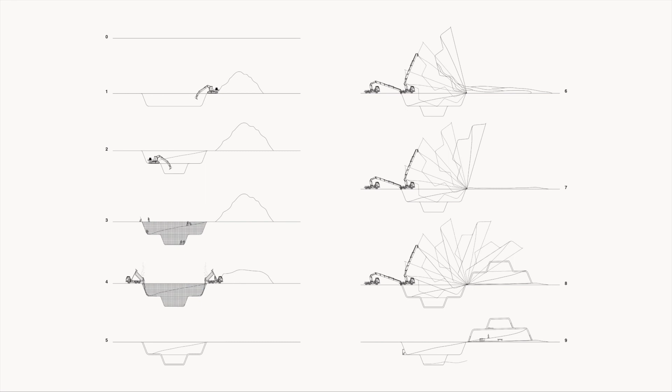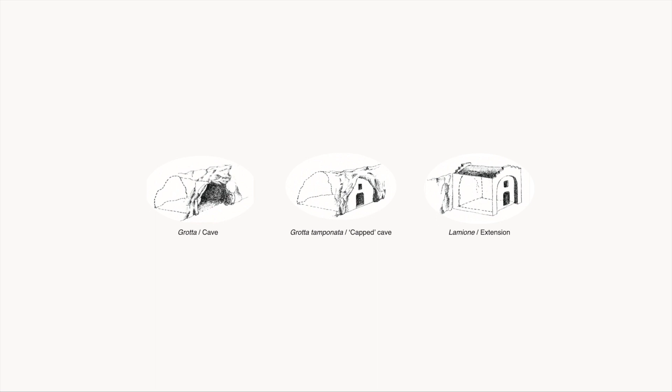Also, the process of construction is itself a lived architecture, and the domestic space is a direct result of that process. Material displacement is explained by the example of Matera, a city in Italy, where the material carved out from the cave is used both for capping the cave and for building extension to the rock.

This different materiality brings about another kind of domesticity, seen in examples of Chinese Yaodong sunken houses, of Matmata in Tunisia, and of a Buddhist monastery in India.

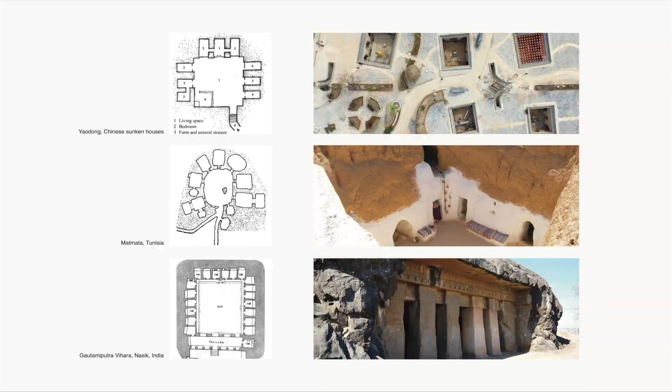Today, a similar level of intimacy and materiality can be made possible with a technique called cast earth. In the mix is soil, water, calcined gypsum, and a set retarder. This opens up possibilities of building at a fast rate.

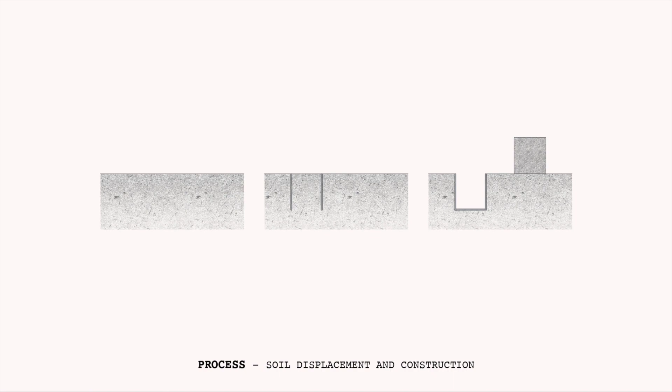The process itself is the first instance in the project where two elements, apparently unrelated and in contrast to each other, the man-made and the more natural, are no longer opposed, but part of one same process. After driving sheet piles in the ground, the soil is excavated and used for the building above ground. The hole, resulting from soil extraction, is inhabited, and the tower, made with that same soil, lived in.

In plan, the result of such a process has inverted our preconceptions. At the top, the building underground. At the bottom, the one above ground.

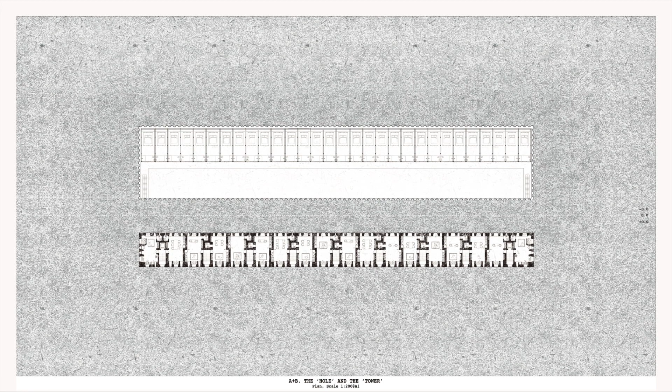The low tower above, exploiting the qualities of cast earth, behaves as a carved underground building. The thickness of its walls is inhabited, while the building underground is unexpectedly rigid and clean in its architecture, coming out from the process of construction that requires sheet piles to retain the soil.

The second instance of that dialectic relationship between elements is seen in the materiality of these buildings. Building A, the Earth Low Tower.

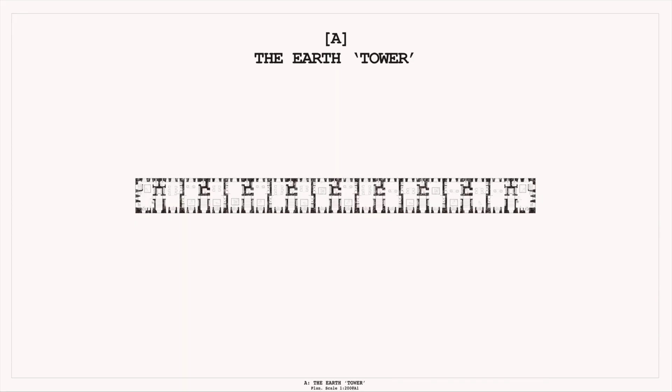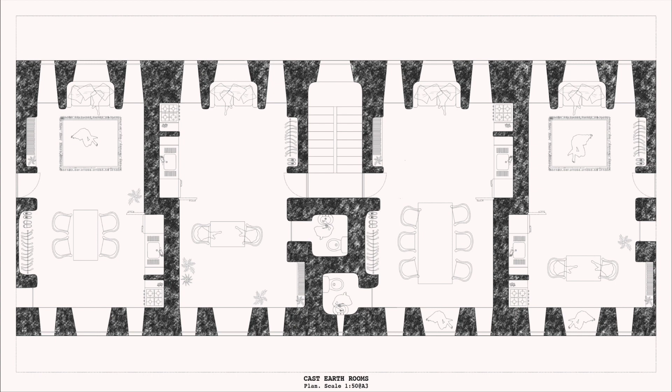The cast earth space upstairs is designed according to the objects and people's activities. Two very different conditions are created. The walls as intimate niches become living spaces, where the relationship between the individual and the object is enhanced. As a result, a free space is formed in the middle of the room, creating two different conditions, architecturally and socially. The clean to dirty spectrum, or the man-made to natural spectrum, reappears here at the scale of the object.

Whereas the backsplash, a veneer of transparent resin, is a thin, shiny layer on top of the cast earth wall. Building B, the metal hole.

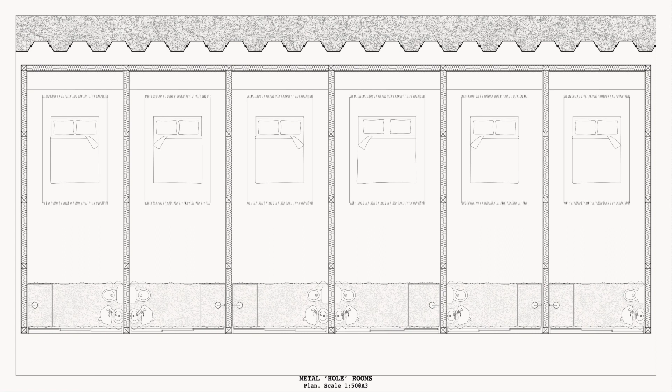The space below ground, for sleeping only, speaks a completely different language. In this case, the water strip of the bathroom is moved to the entrance, which becomes the moment where preconceptions of a clean interior and dirty exterior are broken.

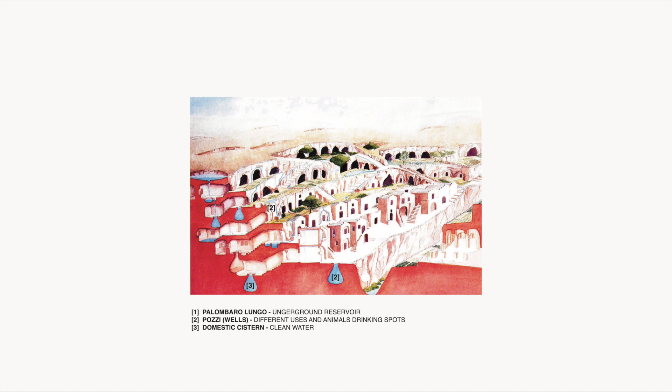Water. Matera, as a case study, is a wonderful example of a water ecosystem across different scales, that goes from larger water collection tanks to the intermediate scale of the neighborhoods to the households. Water has an important social role as well.

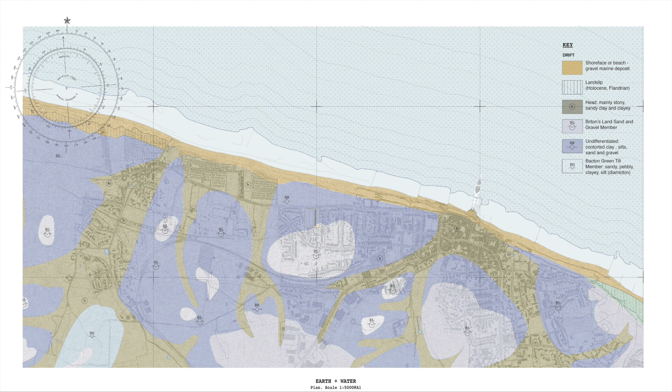Back to Norfolk, a similar approach is adopted, starting from landscape scale, the coast, and narrowing it down to the smaller scale of the housing unit, in a system of water tanks and filtration ponds as a connecting thread.

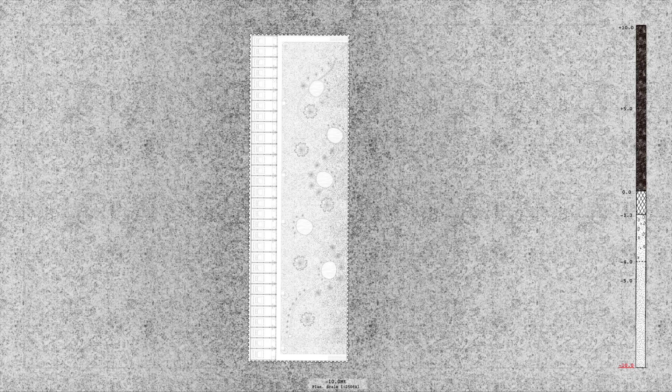An overview in plan cutting through levels from -10 meters to -5 meters to the ground floor, where water allows a usually hidden process to become visible.

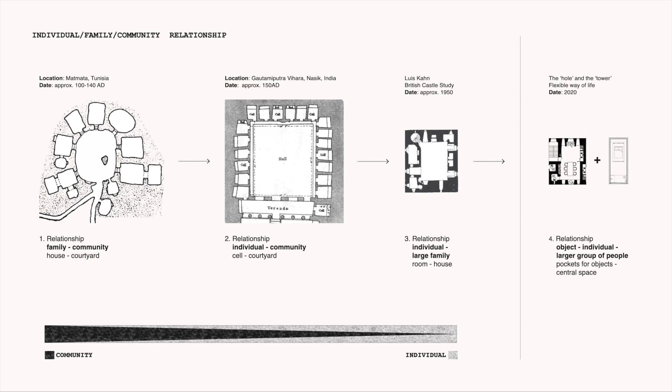Way of life. Inhabiting the earth, unlike living as we normally do above ground, has forced a clear separation between two different kinds of spaces: the nucleus of the family, private family units, and the more public communal space, the central courtyard. The split between social functions, designed by the project thanks also to the properties of the earth, wants to provoke a status quo.

Bringing a more flexible way of living, by which we are no longer going to have a 1, 2, or 3 bedroom flat, but the relationship between single bedrooms and more communal living spaces is available on multiple scales and can be reconfigured more freely.

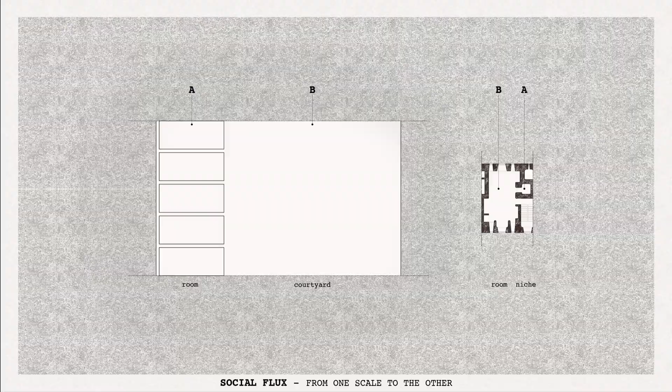The rental system is split into sleeping units and living spaces. Tenants have one sleeping underground unit each and can have their living space upstairs by themselves or share with others, making up a flat split across two buildings.

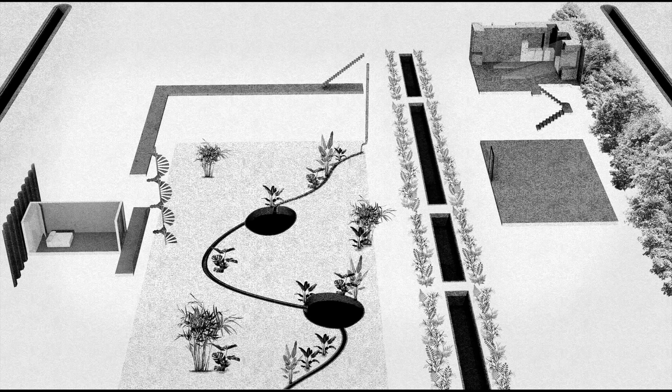They are experienced as almost two extremes, but functioning as one interconnected space. In this scheme, the central garden receives importance as a space for the community, linking the two different spaces in dialogue of sleeping and living.

I now invite you to move through gradients of the earth, from metal to soil.